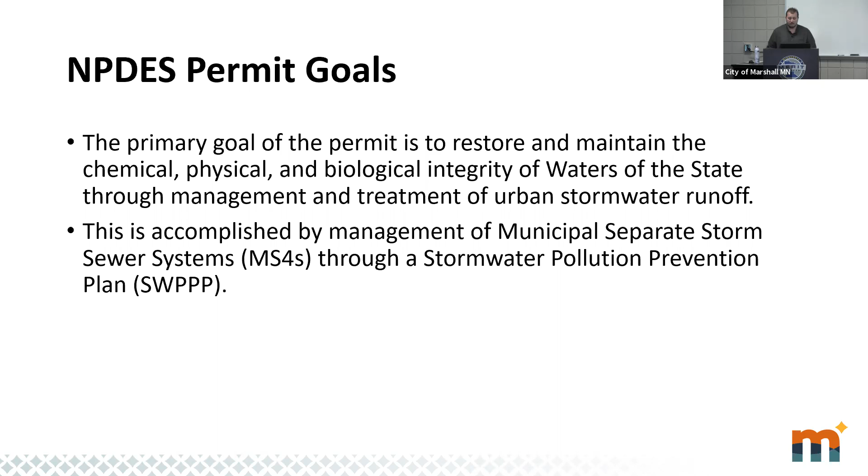The goal of the permit is to restore and then maintain the chemical, biological, and physical integrity of the waters of the state through good, effective management and treatment of urban stormwater runoff. MS4s such as Marshall develop a stormwater pollution prevention plan, or SWPPP, to accomplish those permit goals.

The Minnesota Stormwater Manual, recently updated last year, lists several different urban pollutant sources. I have a handful of them listed here: sources like vehicular traffic, things like oils and lubricants, grease, lawn and garden care. An easy way to think of this is grass clippings or raking leaves and things of that nature. You get fallout from air pollution, municipal maintenance activities like salting during the winter season. So every time you see a snow plow out on your streets spreading salt on the roads, that is a potential urban pollution source.

Commercial and industrial activities, illicit discharges - an example of those would be direct connections, sump pumps or roof drains right directly into the storm sewer system. You can see these around springtime when everybody's got their sump pump hoses right out into the storm sewer system. Improper disposal of household hazardous wastes like paints, pet and wildlife fecal waste, litter, general waste, construction activities - we'll talk about some examples of those a little later on - storm sewer and sanitary sewer overflows, and runoff from residential driveways and parking areas.

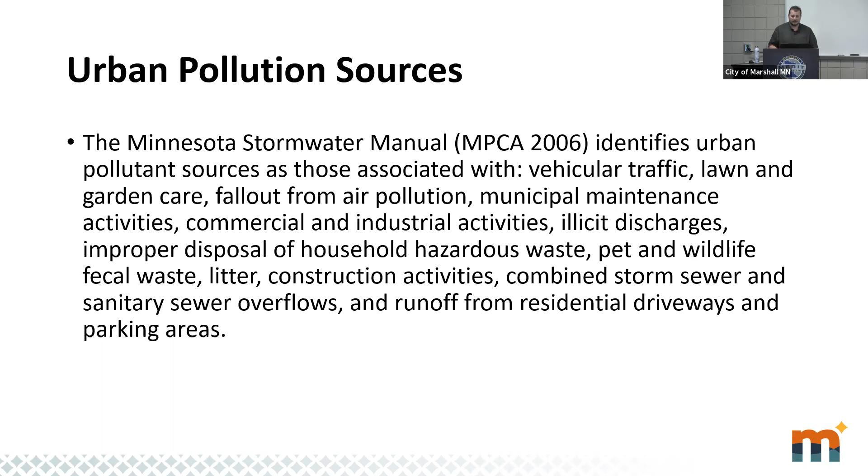From here, I'd like to talk about Marshall's permit and stormwater management program more specifically. Since 2007, the City of Marshall has been operating under its NPDES permit and SWPPP program. This last November, the city was reissued its latest, newest NPDES permit, which lasts for the next 5-year permit term.

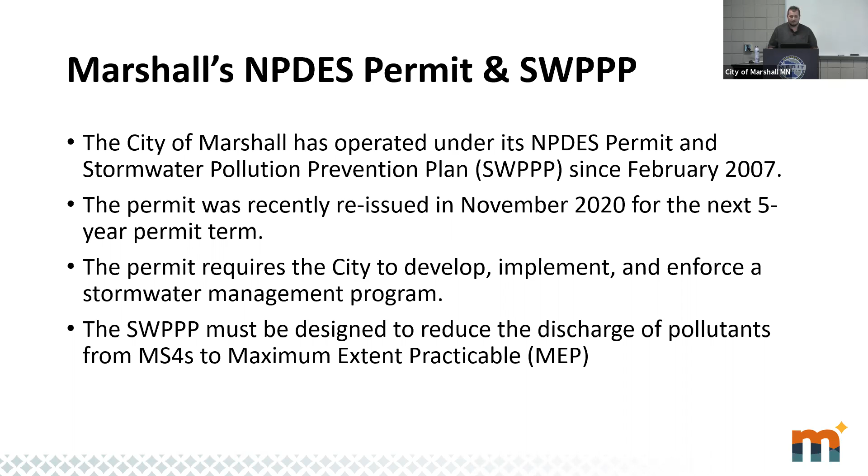As mentioned before, MS4s are required to develop, implement, and enforce a stormwater management program, or the SWPPP, designed to reduce discharge of pollutants to the maximum extent practicable. One part of Marshall's NPDES permit and SWPPP program is the management of urban stormwater pollutants into its impaired waters nearby.

For example, the city has 2 requirements for pollution reduction to achieve compliance with its permit. One is to reduce phosphorus output by 30%, and that's going back a little ways. Phosphorus can contribute to algae blooms. Algae blooms ultimately deplete the dissolved oxygen in the water and transport downstream, which ends up leading to fish kills and other stresses for aquatic animal life.

Most of our aquatic animal life requires oxygen within the water to be able to breathe and use it through their gills. So when you lose some of that dissolved oxygen, the animals and fish wildlife have a tougher time surviving in those types of environments.

The other requirement that the city has is reducing suspended solids, things like soils and grass and leaves within the discharges out into the rivers, under 154 pounds per acre per year. I know it's just a number out there, but it adds up very quickly when you talk about a community of several thousand people like we have here, and everybody being a contributing part to that.

So when you hear people say you can't see the bottom of Lake X or Y River anymore, usually suspended solids are a contributing factor to that. When water gets cloudy and brown from suspended solids, light can't penetrate very deeply into that water, which limits aquatic plant growth.

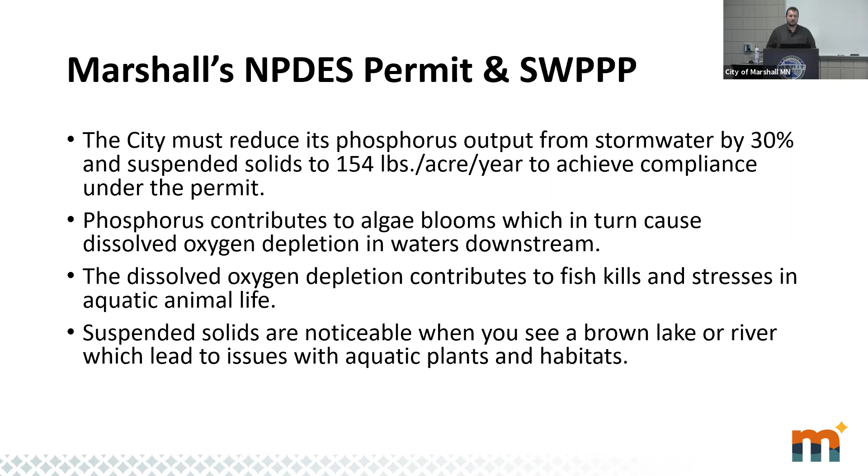Ultimately, the goal of our city's SWPPP is to restore and maintain, back to the original intent of the permit, the chemical, biological, and physical integrities of the Redwood, Cottonwood, and Minnesota rivers, as well as all the local creeks, streams, and other waters our communities share.

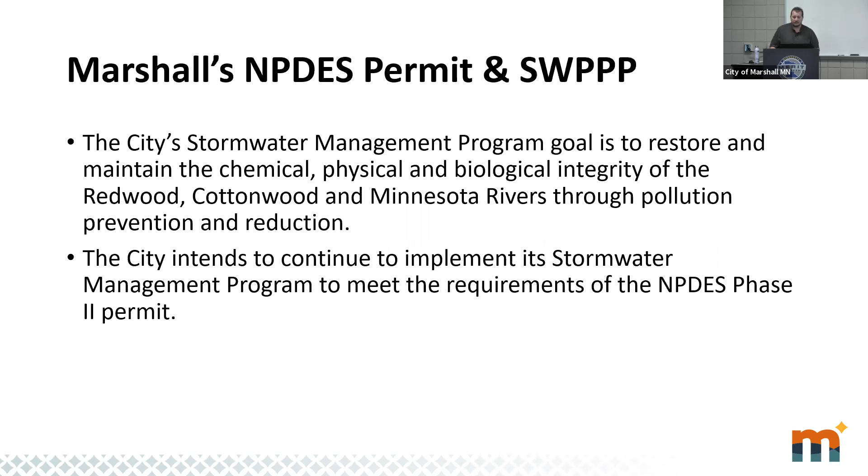The city's going to continue to implement, review, and revise as needed its SWPPP to make sure that we meet the requirements of the NPDES permit. Part of the city's SWPPP includes several best management practices, or BMPs, that I'll refer back to a handful of times in this presentation, which we as a city implement to meet specific requirements of the permit.

Each BMP helps enhance aquatic and wildlife habitats in a certain way, and each is crafted to target a certain type of pollutant or activity. They also contribute to improving the urban environment, which ultimately benefits all of us as citizens of Marshall through an improved quality of life.

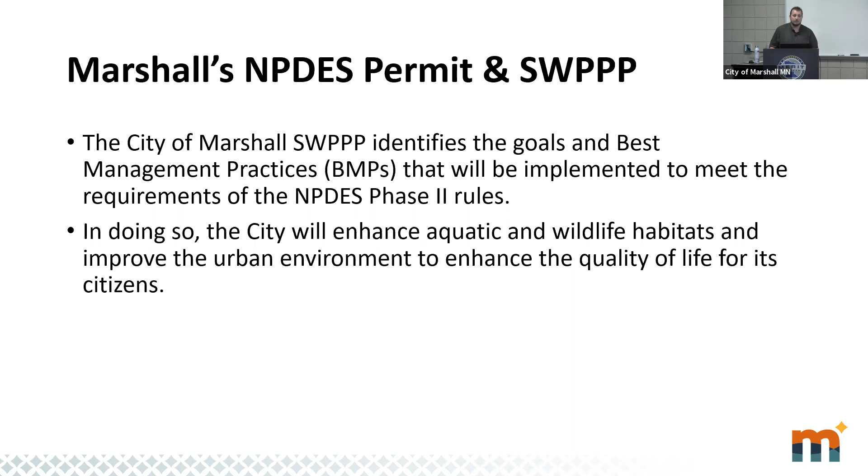With that, I want to talk a little bit about the history of best management practices within the city, and then I'll talk a little bit more about what we do currently.

Before the city was a regulated MS4 under its NPDES permit, back in the 1990s, the city developed a surface water management planning process that integrated traditional planning for adequate infrastructure with ways to bring in water quality components and marry the two.

That way, as we continued to build, develop, and rehabilitate, we were also considering pieces of water quality infrastructure and how to make sure they're both talking to each other and working in harmony. This process also led to the development of many city ordinances that address stormwater management issues within the city of Marshall.

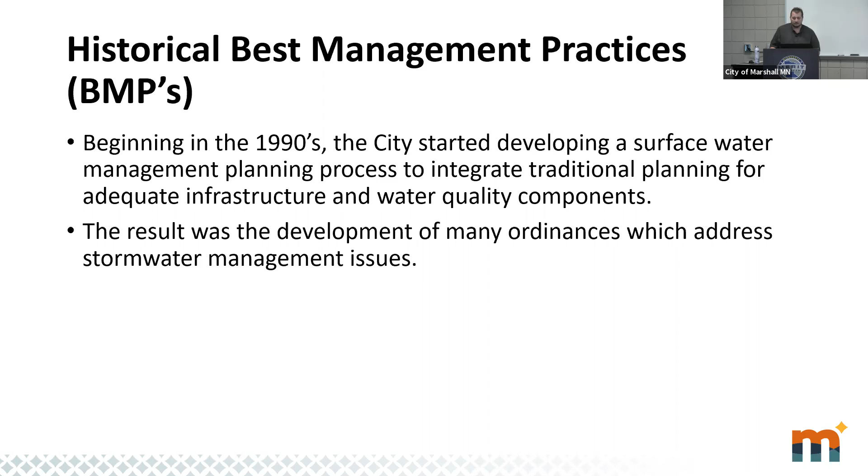Today, under the current NPDES permit requirements, the city has implemented several more different types of BMPs to help manage stormwater related issues within the city.

One of the main avenues the city uses to work towards those permit goals is educating the public, very similar to this annual meeting, as well as other different types of mediums we use to help educate the public.

With this, we do informational flyers, newsletters, and public outreach programs. Public participation is ultimately really vital to our success, because we need participation in both education and programs such as the citywide cleanup. If we don't have participation in that, the program isn't very effective.

We have an illicit discharge detection and elimination program. These are all things our public can help participate with and help us out, not only with compliance with the permit, but helping improve our quality of life and our environment.

The city also works with different parties such as developers, contractors, and homeowners when we talk about construction site management for stormwater control and quality.

The city promotes different types of programs for post-construction stormwater management, in both new construction and redevelopment areas. So anytime we have construction in an area, we look at different types of post-construction BMPs that we can encourage and help develop.

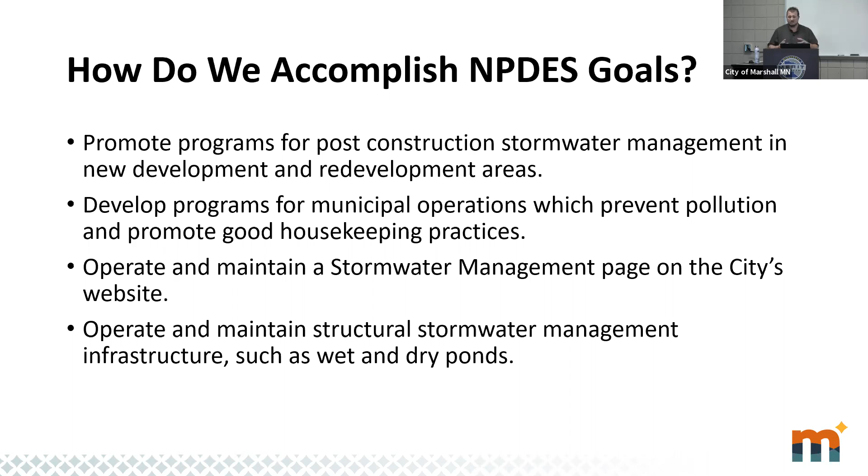Many of our private businesses and industries also contribute with stormwater management of their own, sometimes stormwater ponds and sometimes other mediums, participating in this program as well. Those ponds, as well as other types of treatments, are some of the physical infrastructure the city has to help with our stormwater management within the MS4.

Regularly, public works staff review and evaluate our Marshall SWPPP to ensure we're compliant with the latest requirements of the NPDES. We go through all the BMPs, revise them, and sometimes add new BMPs to make sure the SWPPP and BMPs included within are relevant to the conditions today as well as effective. It's important that they're both.

The city also needs our citizens to help with our SWPPP. We want our people to be educated on stormwater issues within our city and provide great feedback on how we can improve and be more effective.

Residents, business developers, industries, any other interested parties - we really do welcome and ask people to submit comments and input on our SWPPP regularly. We have several different types of mediums to help collect those comments.

Sometimes it's by email - we have a Public Works email - or it's by phone, where you can get in touch with the Public Works Department. We also try at these annual meetings to collect comments as well. It's another great opportunity for us to get comments and input on our SWPPP program as well as the MS4 permit.

One of the main mechanisms of the permit is regulatory requirements and things like ordinances, city codes, laws in town. So we as the city regularly review the current ordinances that address erosion and sediment control, as well as any stormwater management.

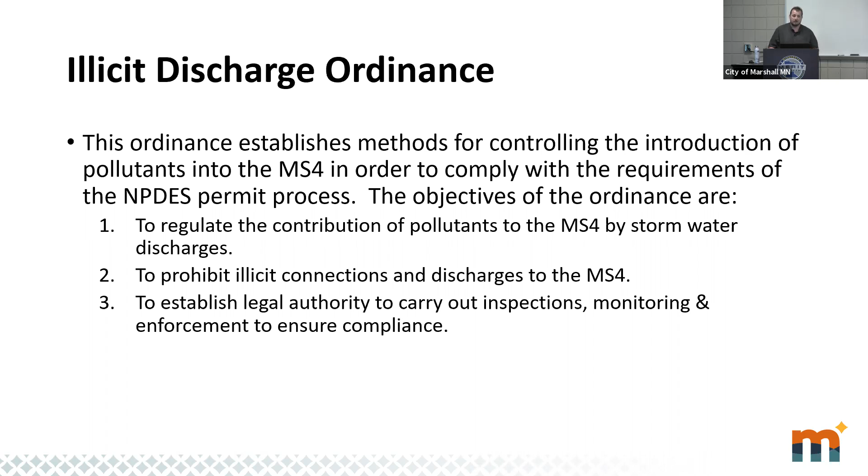Some of the objectives of that ordinance include regulating the contribution of pollutants to the MS4 by stormwater discharges, prohibiting illicit connections and discharges to the storm sewer system, as well as establishing the legal authority to inspect, monitor, and enforce to ensure compliance across town.

Really with that, we spent a lot of time talking about permits and programs and plans and ordinances, and ultimately what a lot of people, especially those viewing this video now, are wondering is how does this affect me in my daily life?

There are a couple different types of groups we direct these things to, and one of them is property owners. There are a lot of different actions anyone can take to help the city protect our nearby water resources and habitats, incorporating BMPs into landscaping and other land disturbing activities.

You can think of rain barrels or rain gardens as a really great way to put a BMP into your landscaping to help with stormwater management and treatment.

Preventing illicit discharges into the stormwater system or nearby ponds and rivers - if you see illicit discharges, for example somebody dumping a bin of grass right into the riverbank, or directly connecting their sump pump into the storm sewer system, those are things we would love for you to tell us, so we can address them with the people creating those illicit discharges, and educate people on why it's detrimental to our environment.

Another piece for people to do is just don't do it yourself. Don't dump grass clippings, leaves, or debris right into the stormwater system or other waters like rivers or stormwater ponds. The city operates a compost site on North 7th Street for City of Marshall residents to dispose of those materials properly. We don't want you blowing grass clippings into the street, and the same goes for leaves in the fall. We don't want those in the streets and alleys either. We'd rather you adjust your mowing pattern so the blowing goes away from the street, and bring those leaves to the compost site instead.

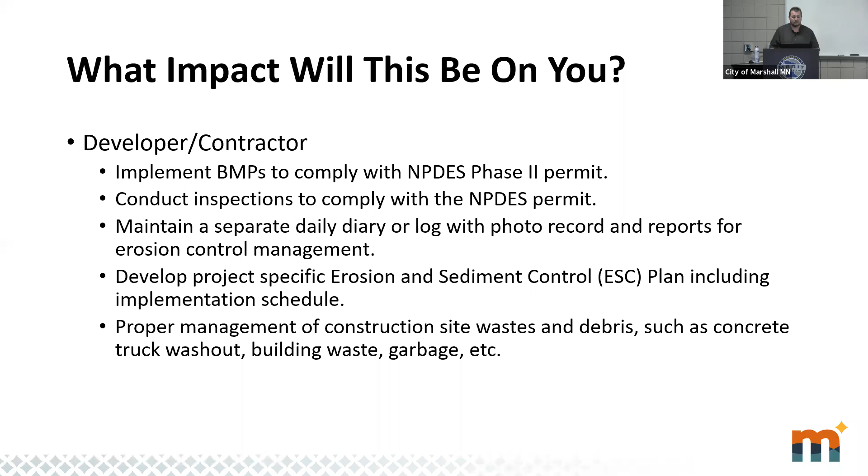It's a lot easier if they handle it on a nice dry day before it becomes a problem. Some other things contractors can do is use different BMPs to control erosion and sediment from washing out, and do inspections of their site to make sure they're in compliance with the permit, maintaining a log, possibly with photos as well. That's always very helpful. Developing an erosion and sediment control plan includes an implementation schedule saying who's going to do what and when. Good housekeeping is really vital on those sites. A properly managed site means waste and debris, concrete washouts, and garbage are all kept contained. Those are all different pieces of the good housekeeping we like to see with our contractors and developers at their sites.

While a site is still under construction, or dirt or soil is still exposed, contractors should use temporary BMPs that keep the site contained and prevent washing down our gutters and city streets into the storm system. Sometimes temporary BMPs include rock entrances, which knock soil off tires as they come out before tracking that soil onto the street. Erosion control blankets are another one, along with sediment basins, bio rolls, barriers, silt fence, silt curtains if you're in a waterway, inlet protection, and a myriad of other temporary BMPs people can use on their construction sites.

Once a site is finished though, turf establishment, like growing good hardy grass, is always the first level of defense in controlling erosion and sediment. Depending on the site and conditions, sometimes you need additional permanent BMPs, like riprap rock at an inlet and outlet for a pipe, check dams, sediment basins, and ponds. You'll see those around town, and those are good examples of permanent stormwater BMPs we see around the city. With that, I'd like to go through and look at some examples of poor practices within town.

And site management is what we want to look at.

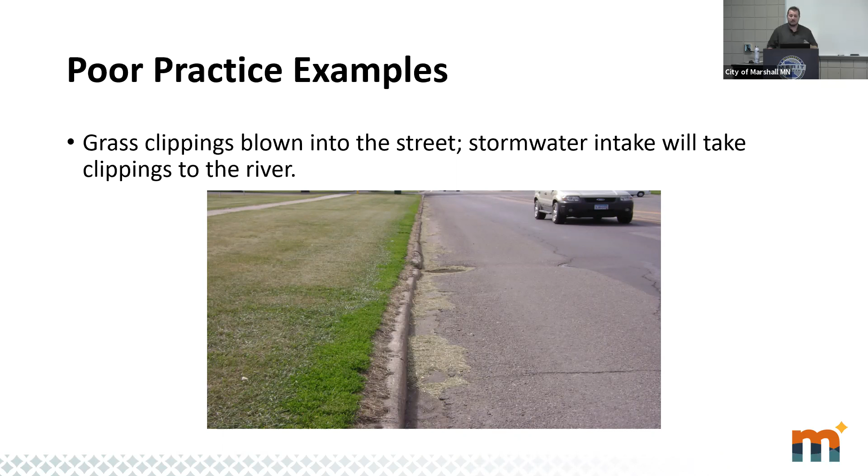We talked a little bit earlier about blowing grass clippings out on the street. If you see here in the picture, these grass clippings are going to go right into the intake, which in turn will end up going right out into the river.

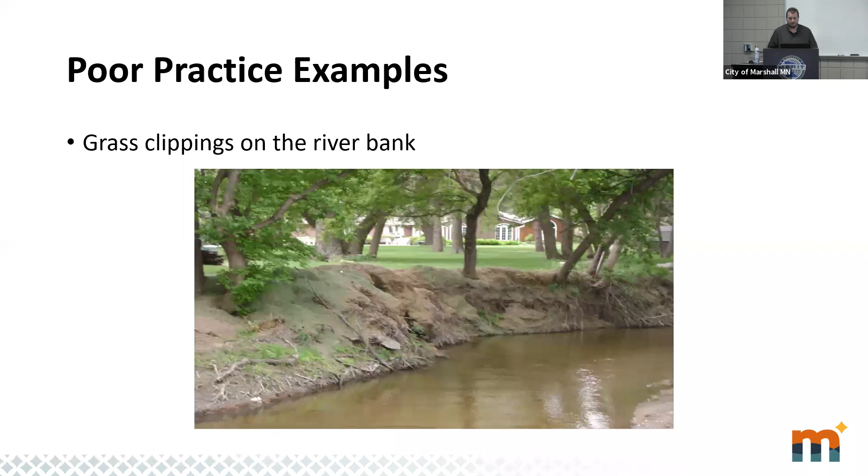And the same thing here. You can just as easily change the mowing pattern to keep the clippings from blowing out onto the street. Here's an example where we should be bringing the clippings to the compost site rather than just dumping them into the riverbank, which will guaranteed get into the river the next windy or rainy day. Again, would rather see the leaves brought to the compost facility rather than dumped out here on the riverbank.

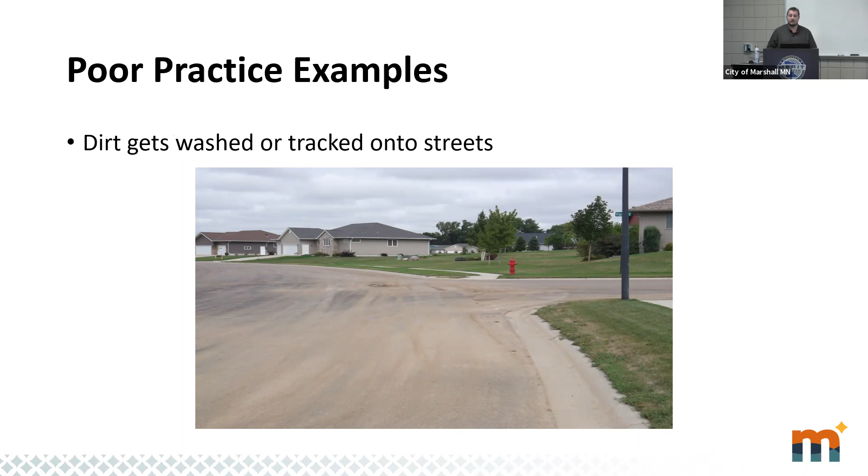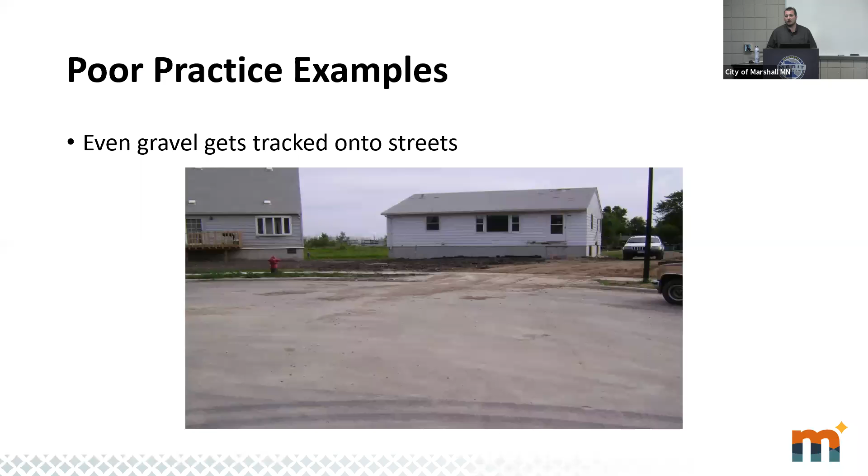Different BMPs can prevent soils from getting off of construction sites and getting washed and tracked into our streets. You can see here in this photo a little bit of that soil tracking out into the street. Same thing here. This is probably a really good opportunity to see a rock entrance, knock off some of that soil before

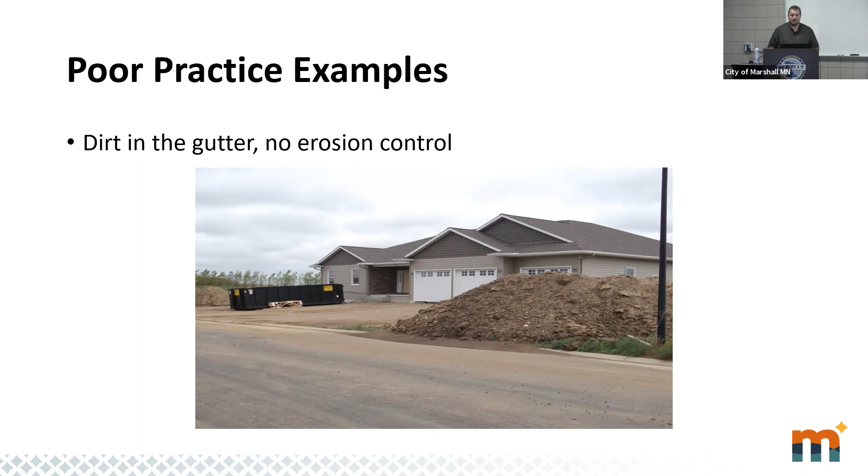the soiled tires knock all that stuff out onto the street. Here you have the exposed soil pile right next to the curb without any type of control. It's not a surprise that you end up seeing the sediments getting washed right into the gutter here. Without any BMPs or controls, all it takes is just a little bit of rain and you end up getting these piles of soil to start washing down into the driveways, and then it gets into the gutter and follows right into the storm system.

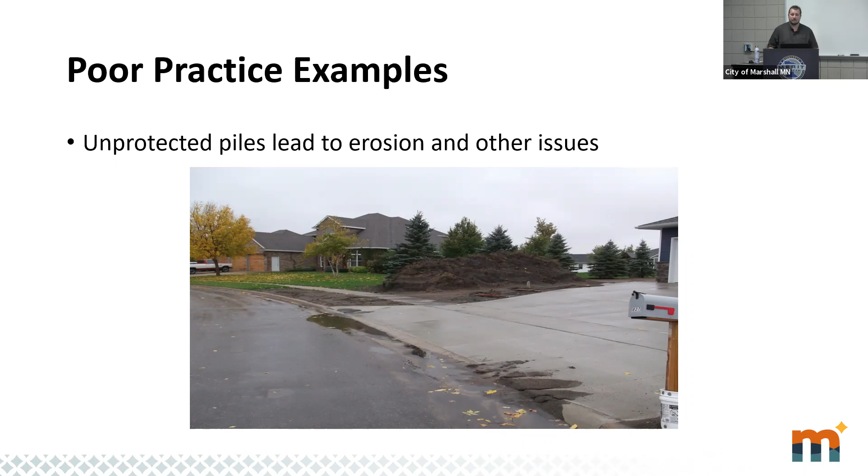This was not a lot of rain. I think this was like a 1-inch rain, so we're not talking about an immense amount. Here, I think this might have been a half inch. So it doesn't take a lot of rain to cause a big problem like this if you don't have those controls in place. Same thing right here, with the dirt right in front of the gutter instead of

in the boulevard or the front yard where it probably belongs. I'm sure the landscaping company that was putting that topsoil down didn't mean for it to end up in the gutter. But again, back to good housekeeping, when you're doing that work, clean up after yourself and make sure everything's where it should be.

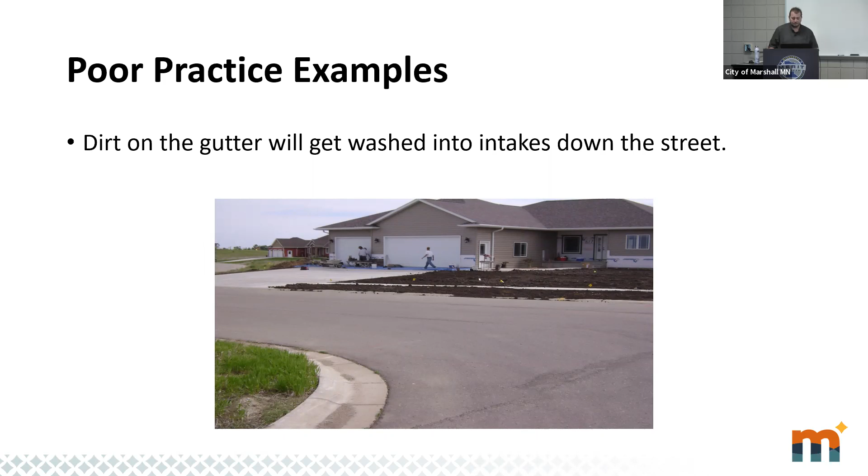You might hear somebody ask, is soil really going to end up in the gutter? Is it just going to drop out of that water? And maybe they doubt that it's even going to wash away. You can ensure them that it does get into the intake. You can see it right here in this photo with the sediment right in front of the catch basins. You get a rainy day and that water will carry those sediments and soils right to the storm system.

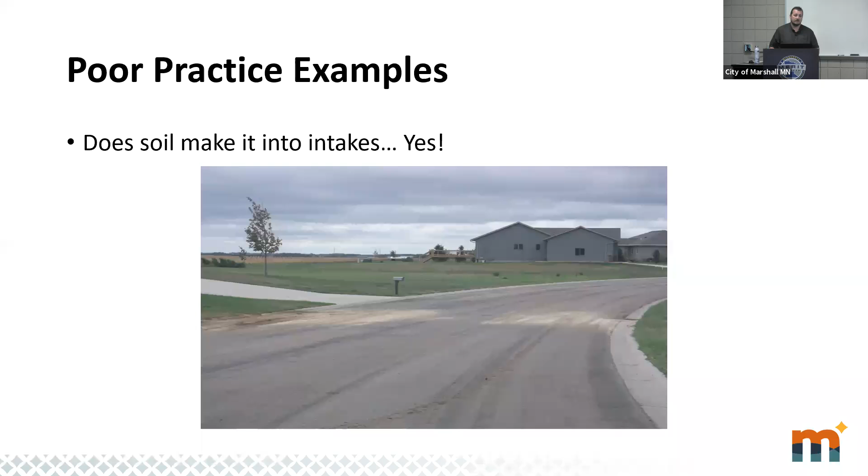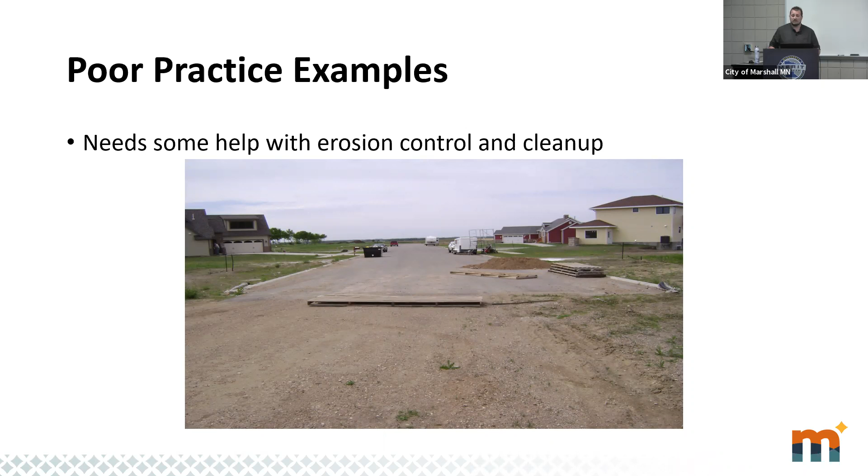Here's another example of just poor housekeeping. Really, you should be cleaning up the pallets when you're not using them or once you're done with them. Move the soil off the street. The street is just not a place for stockpiling of soils or really anything for that matter.

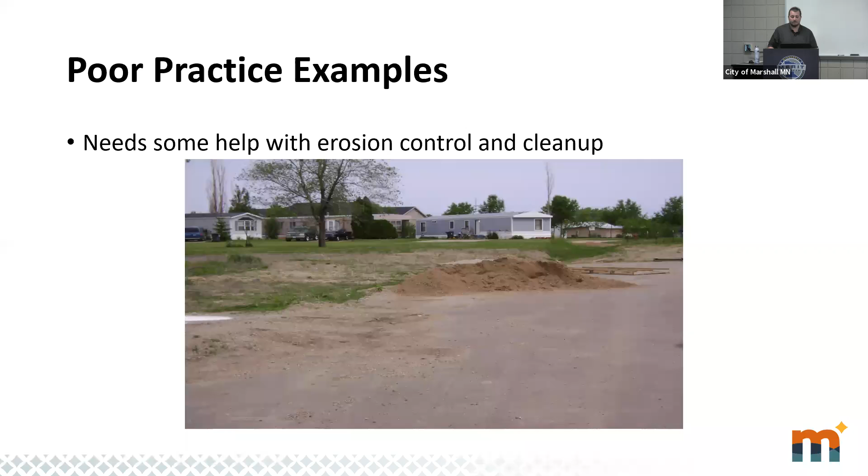Here's another photo of that same area. All the sediments exposed. You can potentially run some of that sediment right into the storm intake. Right down the block, about half a block away, is where the next storm intake was.

The same site. Glad they have a dumpster here, collecting all the debris and trash and keeping it contained. But does it really get windy here in Marshall? I guarantee you, every 50% of the days is going to be windy enough to blow most of that trash right out of that bin.

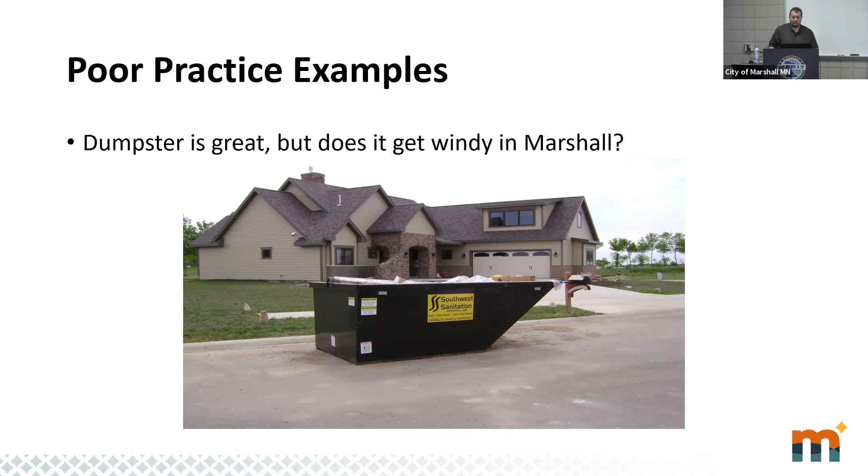All it takes is a lid that would help keep this from flying out into the neighborhood.

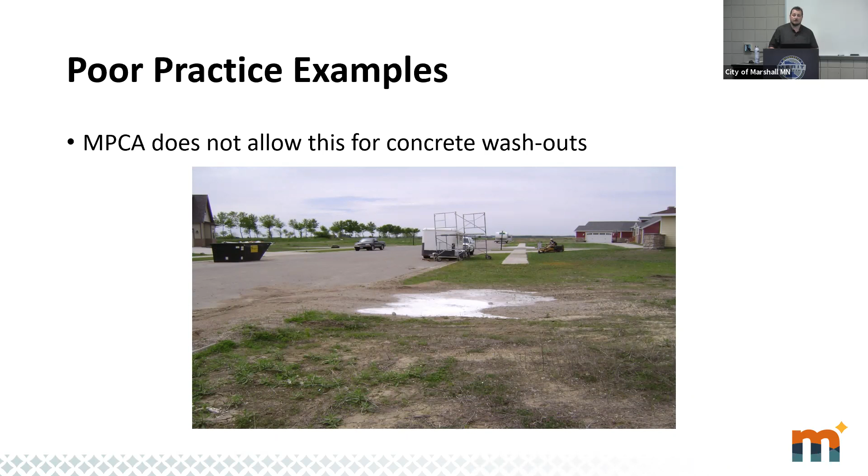Here's an example of a concrete washout. MPCA really doesn't allow this for a concrete washout. These washouts end up in storm sewer systems, or it goes right into the soils here. Obviously, in this situation, if it doesn't get into the storm system, it's going to infiltrate right into the soil, and then you're never really going to get that material out of the soil without digging it out and replacing it, which can come at a pretty high cost.

The proper way to contain these concrete washouts is a contained area with a liner. You'll see them with 2x lumber and a nice poly liner that's connected and kept there to prevent the concrete washout from leaving that contained container. Once it's dried or hardened, you can just take that liner and dispose of it properly, rather than in this photo, where it's not going to be contained. It's going to end up somewhere else where it shouldn't be.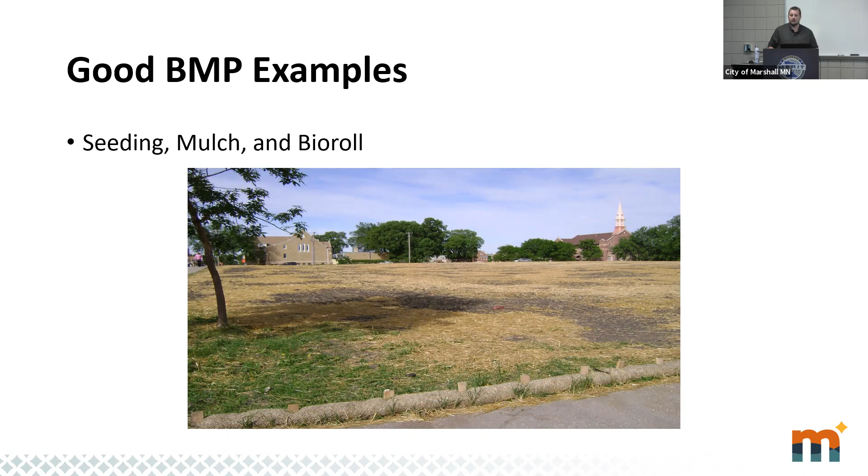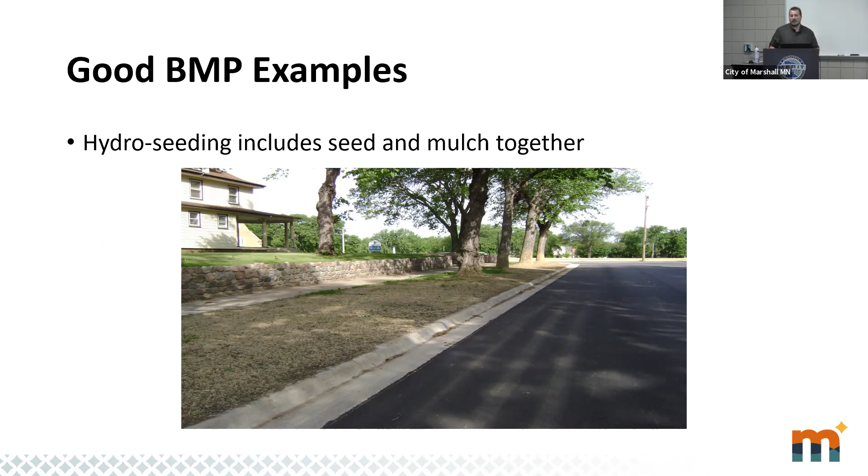Here in the city of Marshall, we do a lot of hydro seeding. You'll see it all over town. This ends up combining seed and mulch together, so it's another good way to keep the soils from washing out and going down into the gutter or into the storm system.

Another good hydro seeding example here. You can easily see there's no exposed sediment that's going to end up in the gutter or downstream into our storm system or rivers.

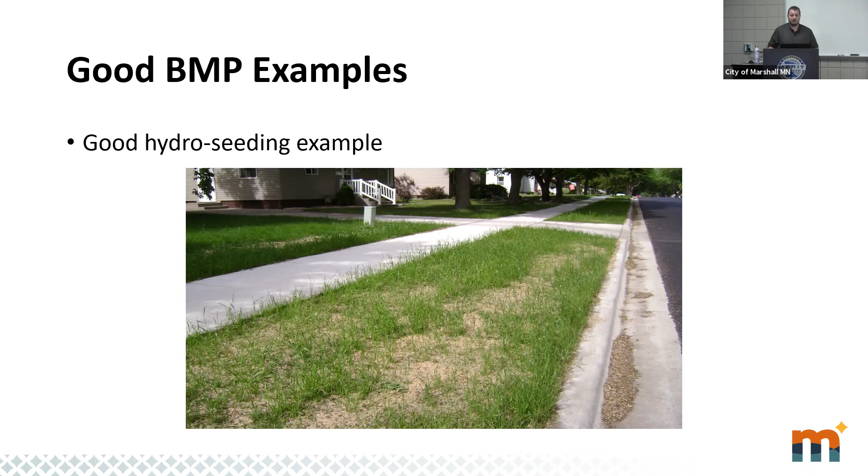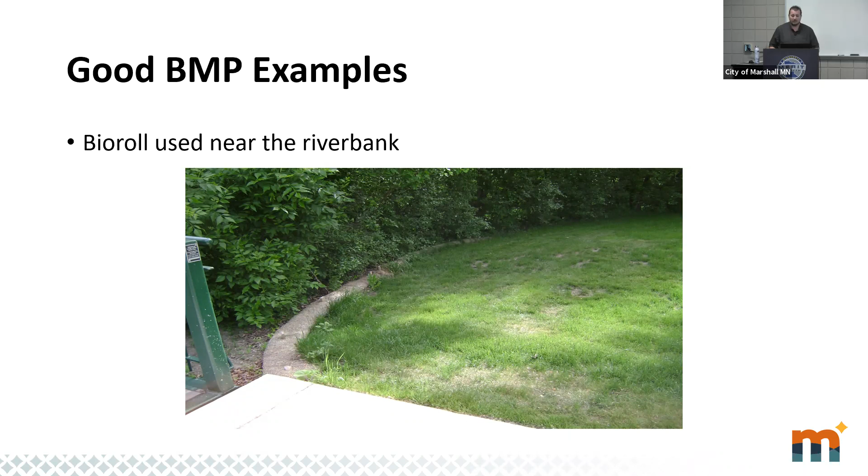Here is right next to the Redwood River. You can see the riverbank—well, I guess you can't really see the riverbank, but you can see all the trees right there. This is keeping all that potential runoff from going out into the river.

Here's a really good example of inlet protection, keeping sediment from washing right into the storm system directly through the intake.

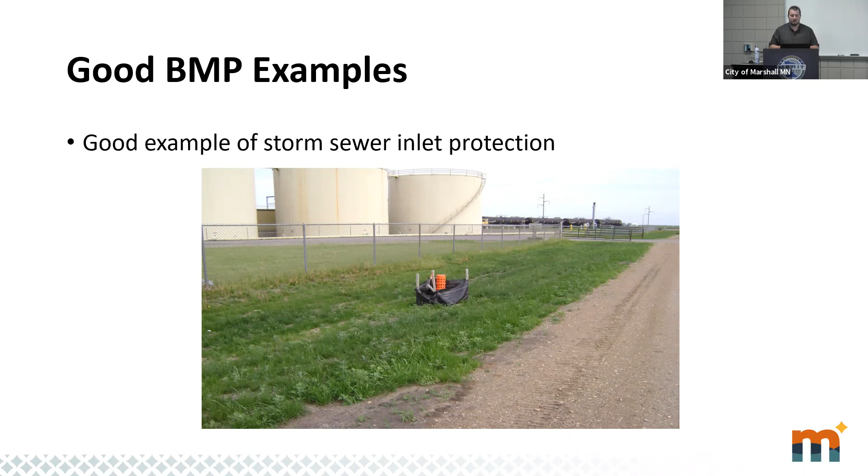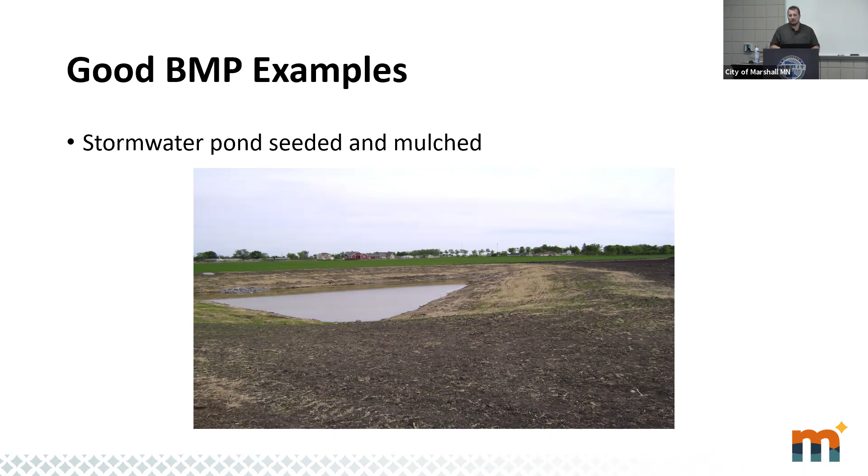Here, if you look at the photo, you probably could use a little additional mulching towards the front, but what I'd like you to see is the slopes around the pond. Really good seed and mulch around the pond slopes—that's really what you want to see, especially when you're working around a pond that's going to have stormwater treatment. You don't want a lot of sediment getting into there right away.

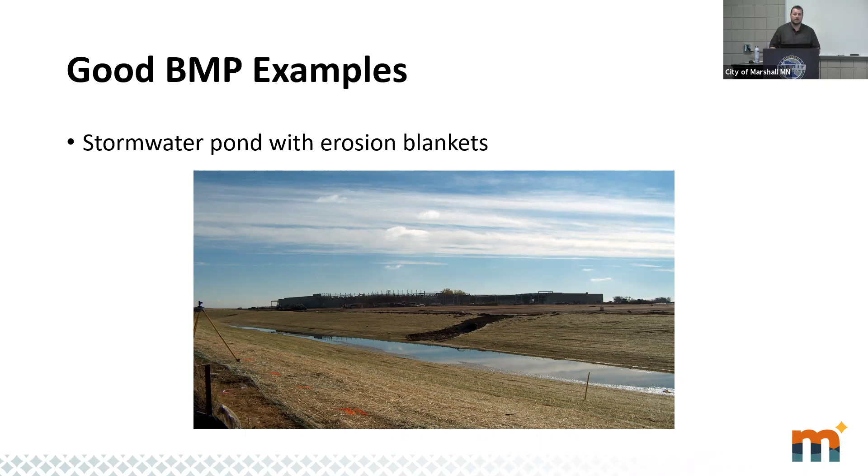In this kind of situation, you've got a bit of a channel. This is actually Walmart's stormwater pond—it's a very long pond. In situations like this, erosion control blankets can be used to help keep the site from having erosion or sediment runoff. So erosion control blankets are another really good option for a temporary BMP to keep soil from washing out into the storm system.

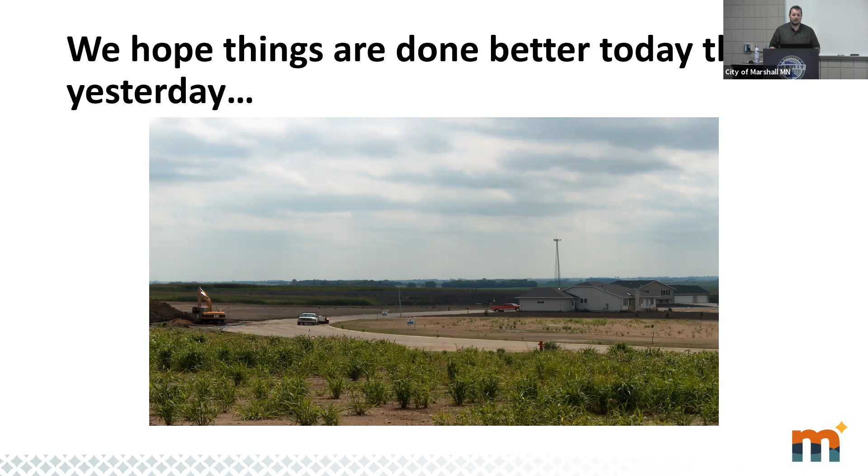So ultimately, through everything we do today, we're hoping we're doing better than yesterday. And if we really think about our continued improvements, what is that going to do for our community, as well as our watersheds and habitats for tomorrow.